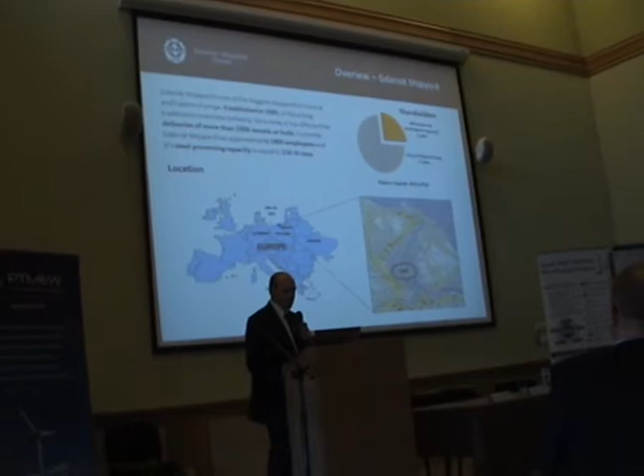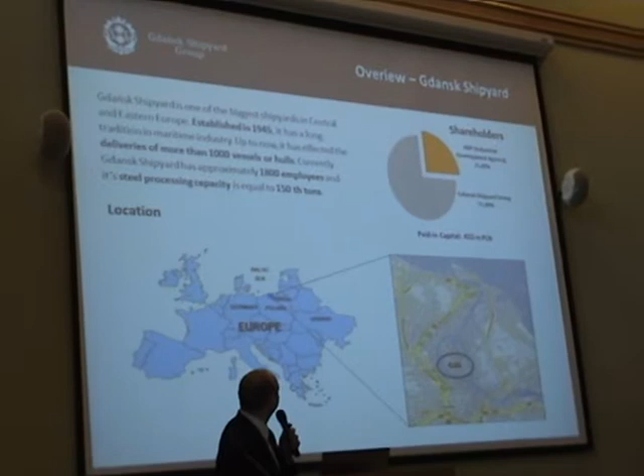We have a company specially dedicated to the producing of towers, and also a small special purpose company for employing people. In our history, counting from 1945, in our reference book, there are more than 1,000 seagoing vessels, and we employed about 1,000 people.

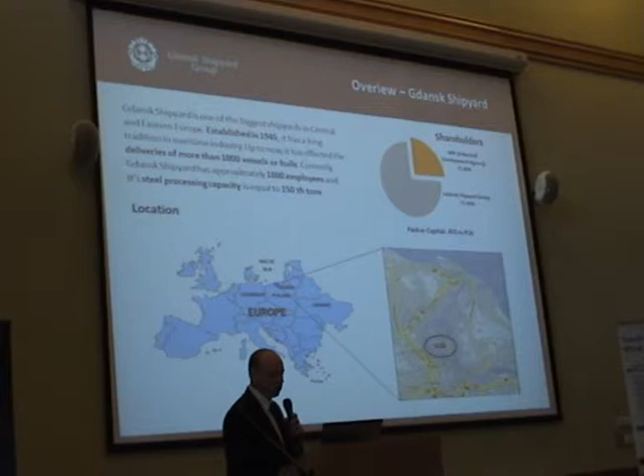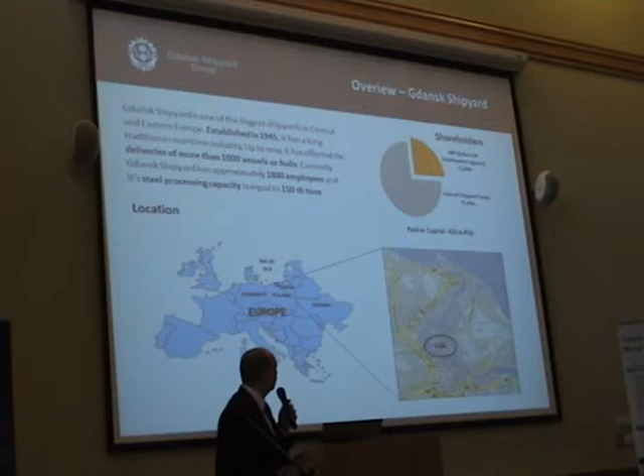Annually, we have a capacity to proceed with 150,000 tons. Stocznia Gdańsk shipyard belongs to the Gdańsk shipyard group in 75%. The rest of the shares are in the hands of ARP, the industrial development agency responsible for the restructuring of the Polish industry.

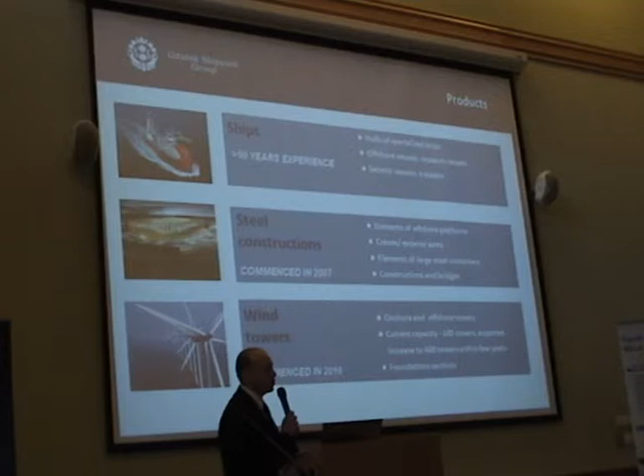Our business plan is based on 3 legs. Of course, the main business is building ships. We focus on specialized vessels and hulls, for searching for oil and gas, fully equipped with sophisticated equipment. We're also building seismic vessels, and in our opinion, trawlers are also a growing market, especially from the Russian side.

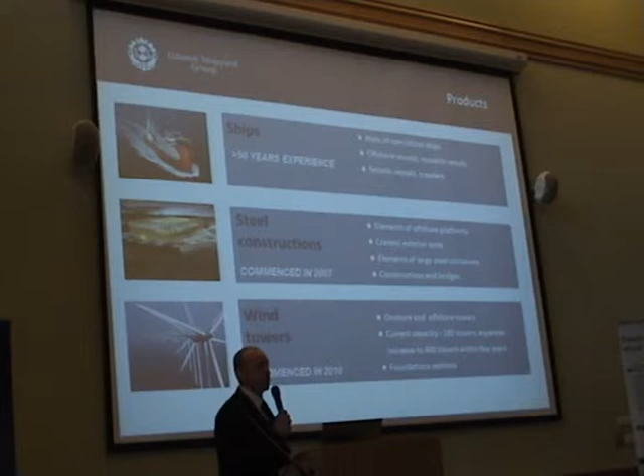The second part of the business is steel constructions, which commenced in 2007. We are building big elements of platforms, cranes, bridges, roofs. You may have seen Gdańsk airport - part of the roof is built by Stocznia Gdańsk. Last year we also extended our cooperation, signing a lease agreement with Mostostal Chojnice, giving us access to their working facility and market for the next 2 years.

Last but not least is the towers business. We focus on the production of onshore as well as offshore towers. With current production capacity of 100 reference towers, we expect to increase this capacity to 400 towers.

We also have a business plan for the production of subsea structures, foundation structures. Our key asset is probably one of the biggest, or maybe the biggest, fabrication hall in Europe, fully equipped with the necessary tools for plasma and gas cutting machines, welding equipment, and lifting capacity. Altogether this gives us the possibility to proceed with 150,000 tons per year.

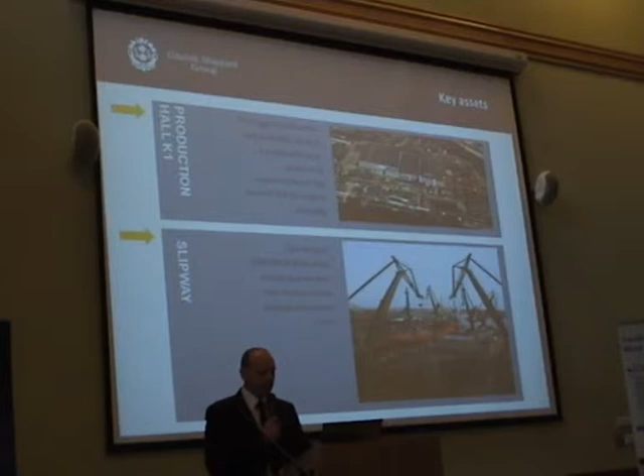We have a slipway for launching vessels, and a quite modern painting line for such a business, which we are currently using for painting the towers. In the future we are building a new painting line dedicated only to painting towers.

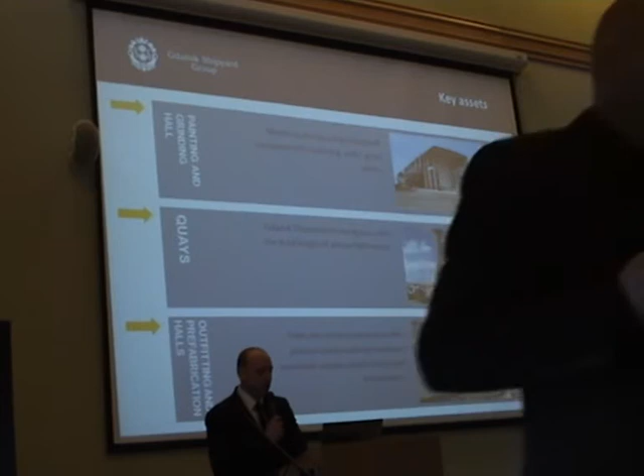We have long quays for outfitting not only vessels but for other production, and a lot of halls with modern equipment for prefabrication of steel. Our location in central Europe gives us access to the market, especially Baltic Sea, North Sea, Great Britain. So in future we would like to focus on the offshore market, especially wind farms to be built in that area.

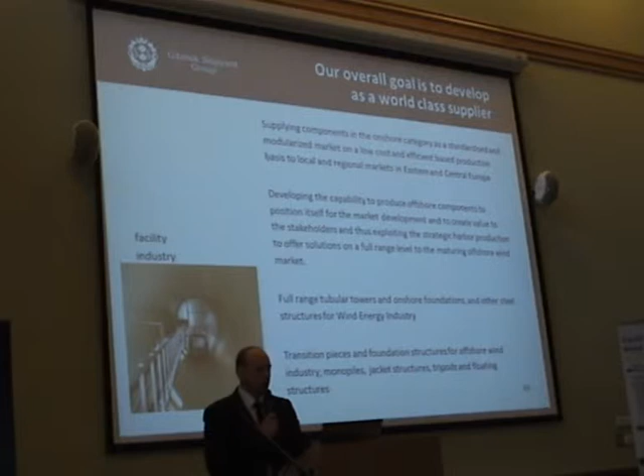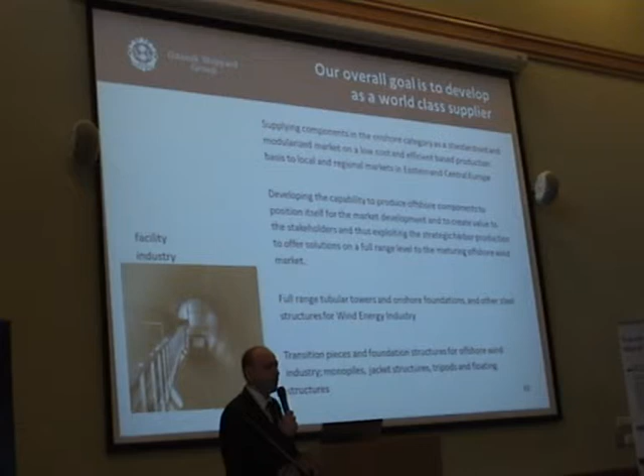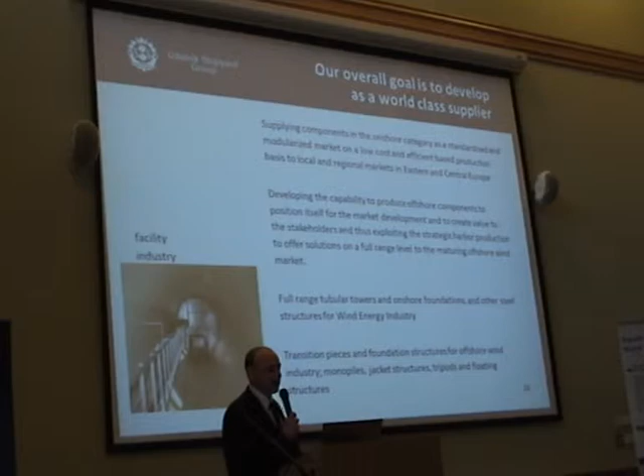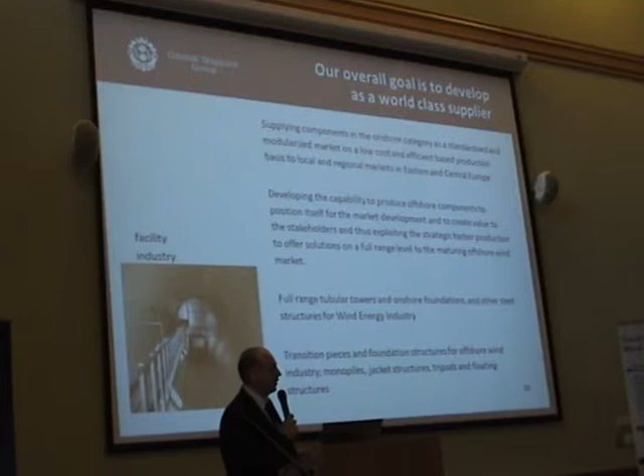A few words about GSG Towers - our main task is to be a world-class supplier. We already signed long-term agreements with two of our clients, and we are under quality approval with the third. By the end of this year, I hope we will have 3 long-term agreements with key producers, which allows us to think about the future more comfortably.

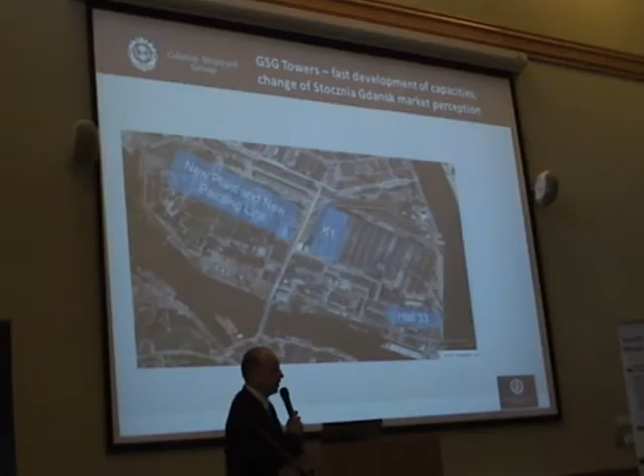In our business plan for the future, in the middle of this picture you can see from a bird's eye view the fabrication hall and K1, where there are existing 2 lines for the production of towers. On the left-hand side you can see the place where the greenfield factory will be built. We already started some works, and hopefully within 1.5 to 2 years we start production in that factory.

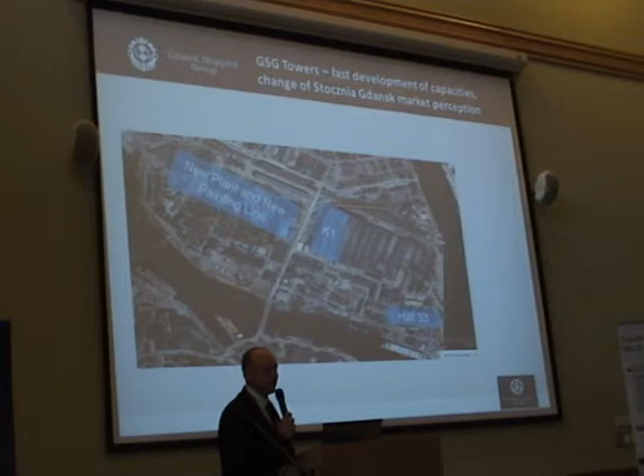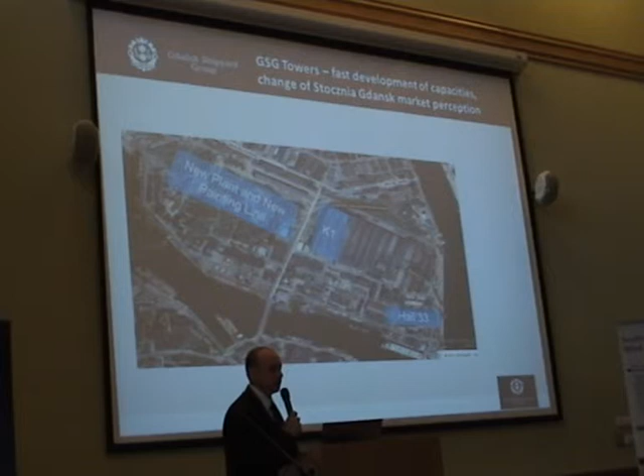We already bought a painting line, and we're looking for the erection of this painting line still this year. We also have a brownfield factory, Hall 33, an existing facility where we would like to start production of constructions made of very thick plates - parts of monopiles, jackets, tripods, or other subsea constructions dedicated for the offshore wind farm business.

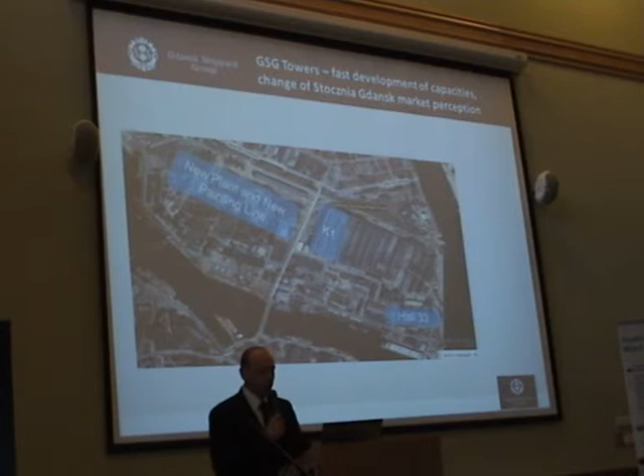So altogether, what we propose to our customers is onshore towers. Actually, we started production for towers located in Poland and Sweden. We will have a modern painting line dedicated for onshore towers as well as offshore.

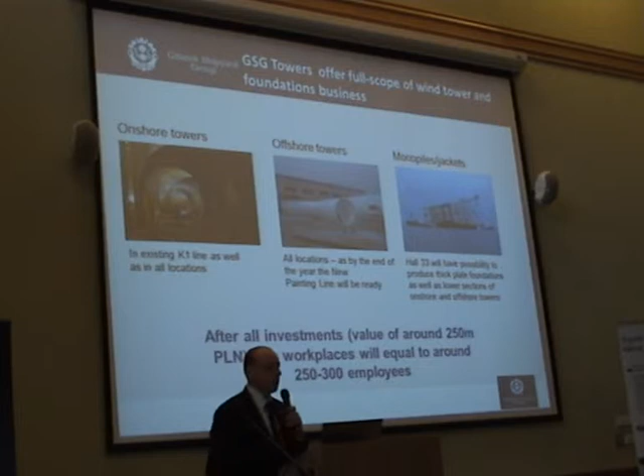We decided to build a painting line because there's no use heating too much cubic meters - it's losing money. So we built a lower plant, which gives us the possibility not only to paint but also to do metallization, because the difference between onshore and offshore towers is surface treatment. With offshore towers, we're talking about zinking or the metallization process.

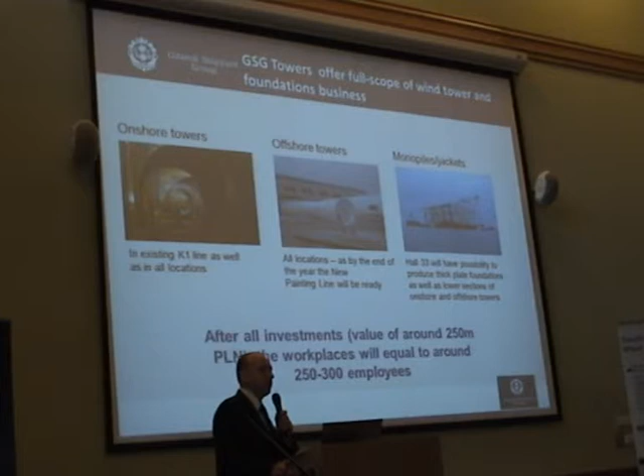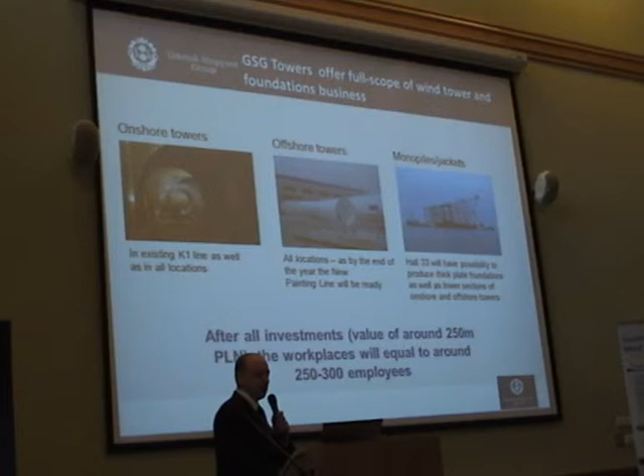Altogether, capex is about 250 million, and what's important, most of this money will stay here in Poland, in our hands, and we are supposed to create about 300 new jobs.

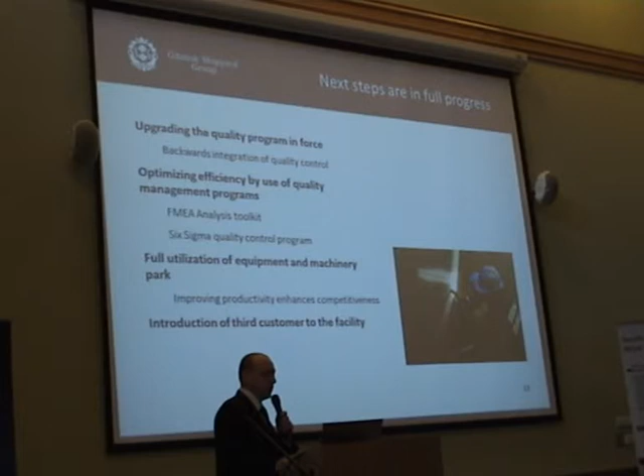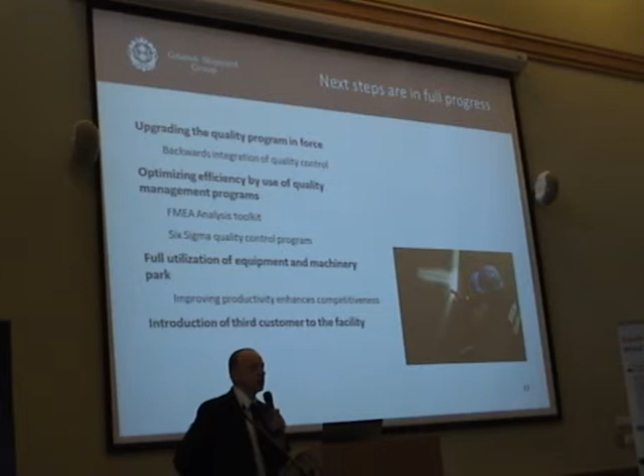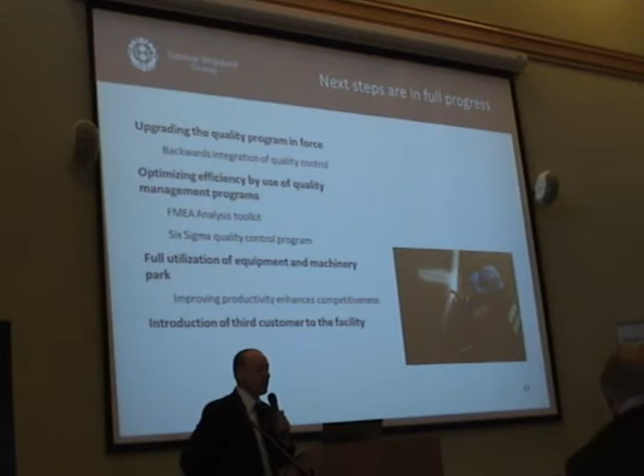What we are doing simultaneously is working to increase our quality and efficiency. One reason to divide the process of building towers from shipbuilding is that it's a quite different mentality from the point of view of our customers. To fulfill their requirements, we had to separate these two businesses and establish a new culture of production, dedicated not only for onshore but also offshore, where there is no place for any mistakes, and the cost of transport to the wind farm is tremendous.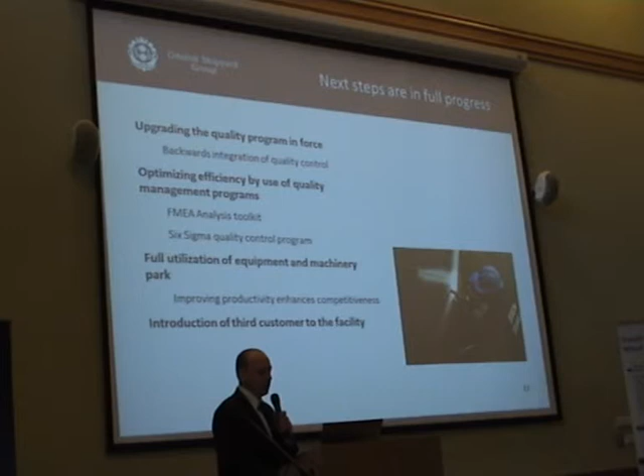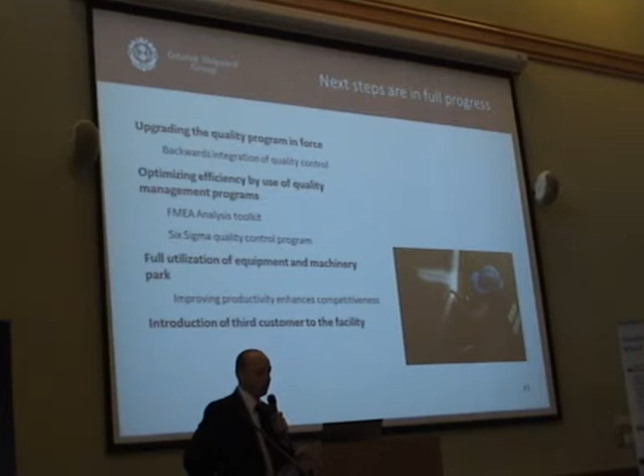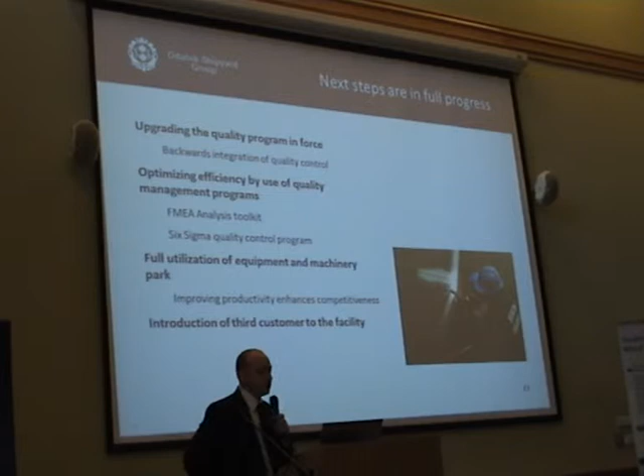So we are improving productivity, and we are under quality process with the third client. Hopefully by the end of this year we will have 2 long-term agreements with our clients, and we are still building our chains of supply in Poland for components like internals, steel plates, platforms, cables, and thousands of small pieces which we use for building towers and other constructions.

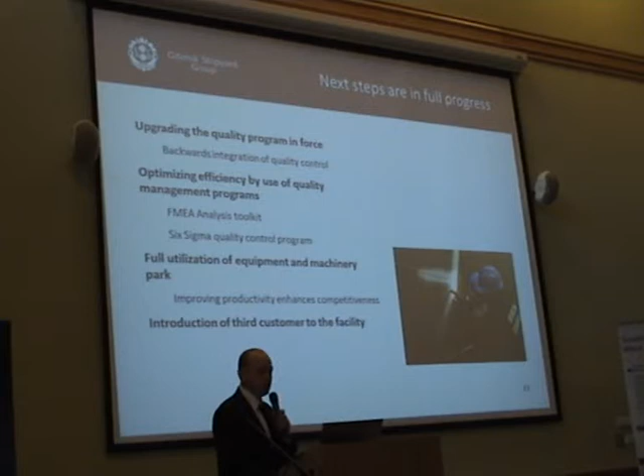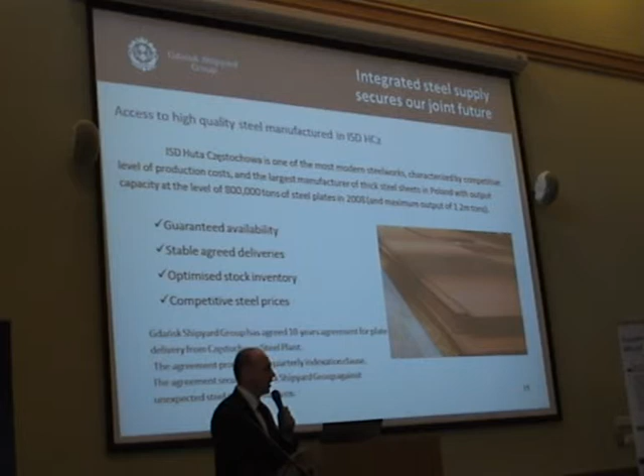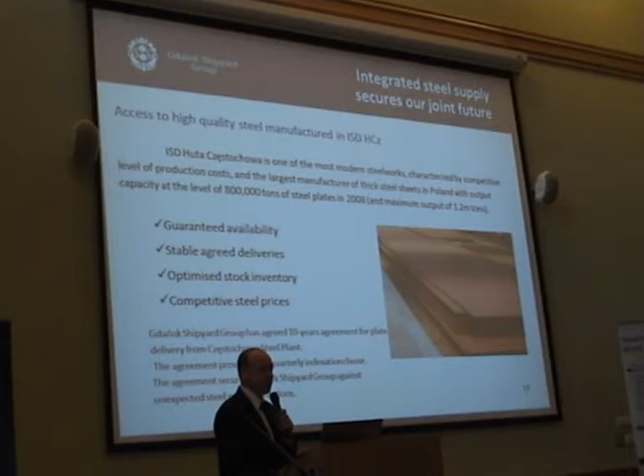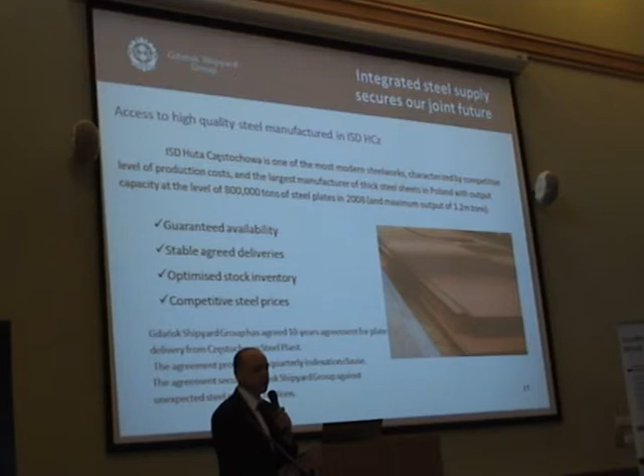We have a long-term agreement with ISD Huta Częstochowa, so we have access to steel plates. We have flexible terms of payment, flexible delivery dates, and that shows that the market can involve not only shipyards or companies from the Pomeranian areas, but also companies from central or even southern Poland.

After the shell can is ready, we transport it to the line where we make the circumferential welding, and the cans come together into one big section. Such a section can weigh about 70 tons for onshore. For offshore projects, one section can even reach 300 tons. So it's a big difference.

After the sections are ready, which look like that, we transport them to the painting line, painting chamber, where we do shot blasting or grinding if necessary, and of course painting or metallization. After a few days, the ready, painted tower comes out of the painting chamber.

For transport, we use special cranes—mobile remote control cranes. This transport goes to the site where we outfit it with internals such as ladders, platforms, cables, and even a service lift inside.

That's the picture showing the stock of goods ready for transport, just to be shipped away from the shipyard or transported by trucks and lorries. And that's the picture of one of the towers which is going for a project in Poland.

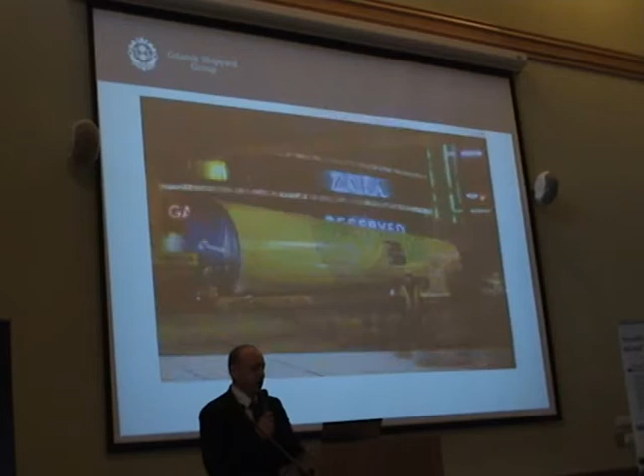Transport happens during the night under supervision of the police. And that's the picture of our tower at the wind farm located in Poland. It was quite a rainy day, but I took the picture just to remember our first tower which is standing.

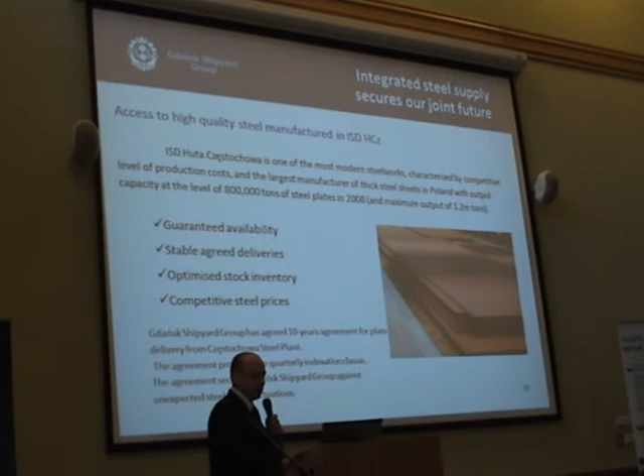Now I would like to mention a few things in addition to what we heard today from our colleagues. Maybe these pictures are not in good order, but what I want to raise is that the wind energy market is not only profits for companies in Pomeranian areas. We are starting like a snowball from very simple things like steel plates, internals, screws, bolts, ladders, platforms, and thousands of other things which have to be and can be produced in Poland.

We have a tower, our blades, and of course a turbine, and we can produce in Poland some electrical components for such a turbine as well. And we have a very good example of the most sophisticated product, which is a jack-up vessel, and I hope my colleagues will elaborate on it in detail.

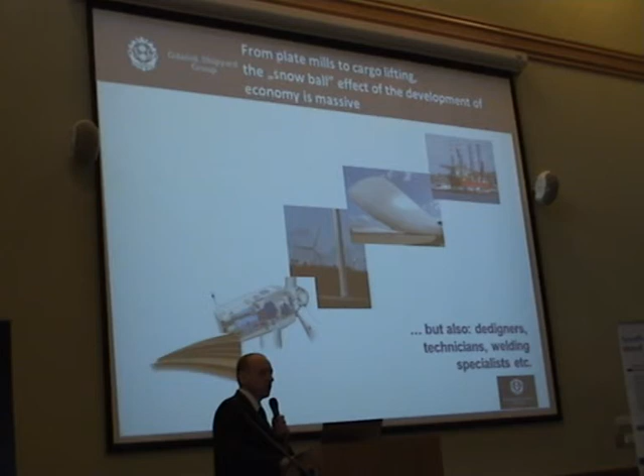What is important is that this demand on the market gives us the possibility to increase the ranks of designers, technicians, specialists, welders, and engineers as well. So it's great potential, and the beneficiaries of this market are not only Tri-City or maybe Szczecin.

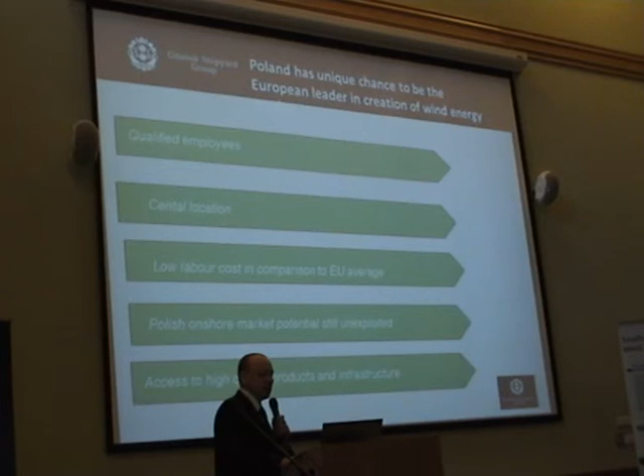What we can propose to our customers in Poland is, of course, qualified employees. We offer a central location and, for the time being, lower labor costs. We have big potential in the onshore market still, and we have a lot of challenges in offshore business—Polish offshore wind farms.

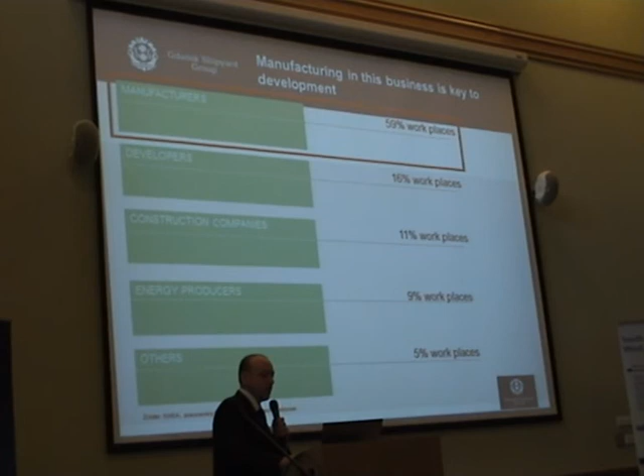That's the table, from the source European Wind Energy Association, showing how many working places are generated by each stage of production. What's important is that about 60% of the jobs are generated by manufacturers.

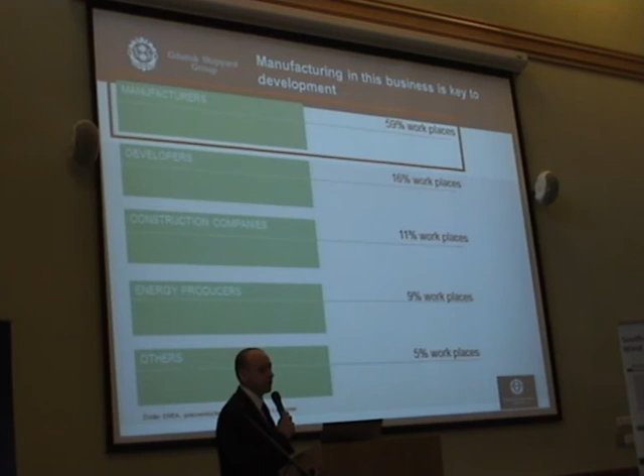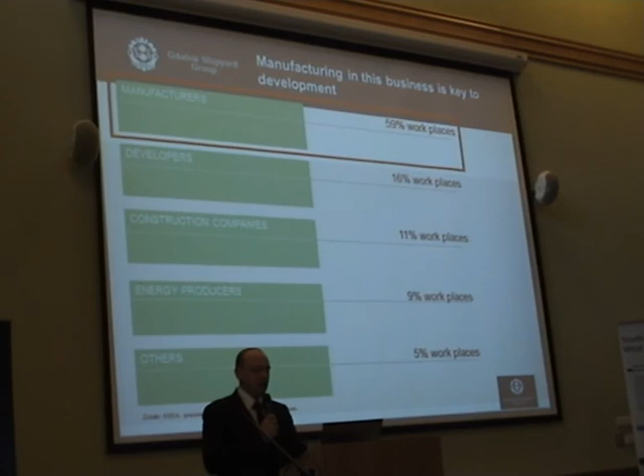So that means shipyards, steel producers, and 16% is generated by developers and investors. Construction companies account for about 11%. Energy producers are 9%, and others—for instance, producers of internals—are about 5%.

What we had today, and what I mentioned shortly, this chance needs some mechanisms to support us. First, of course, is infrastructure development, giving us the possibility to talk about big contracts. The second is education and all these aspects—we have a big tradition in Gdańsk and Szczecin, we have technical schools, and we need some kind of support in creating the image of the Polish areas as an attractive place to invest. I think the most important thing in future is after we have all our facilities ready.